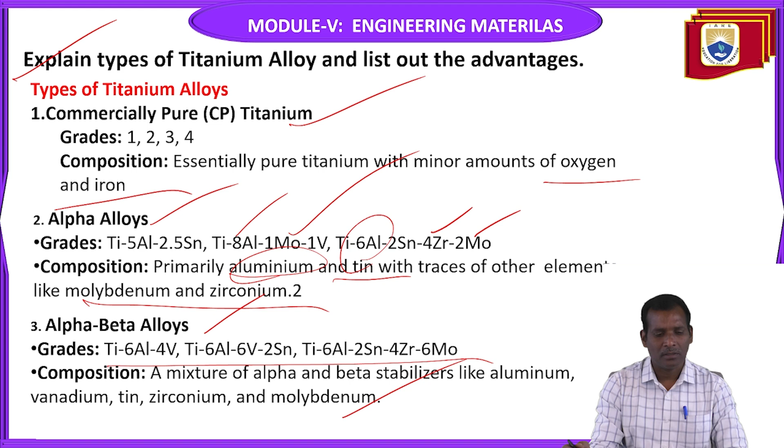Alpha beta alloys: the grades are given like this. The composition is a mixture of alpha and beta stabilizers like aluminum, vanadium, tin, zirconium and molybdenum. So the categories are commercially pure titanium, alpha alloys, alpha beta alloys, and then beta alloys. For beta alloys the grades are given, with titanium, vanadium, iron and aluminum added, and higher amounts of beta stabilizers like vanadium and chromium, along with molybdenum and zirconium.

The advantages of titanium alloys are: one is high strength to weight ratio. Titanium alloys have excellent strength while being significantly lighter than steel. Another property is corrosion resistance: high resistance to corrosion in various environments, including seawater and acidic conditions. Wherever these materials are exposed to a seawater environment or acidic conditions, they have the resistance to withstand these environmental conditions.

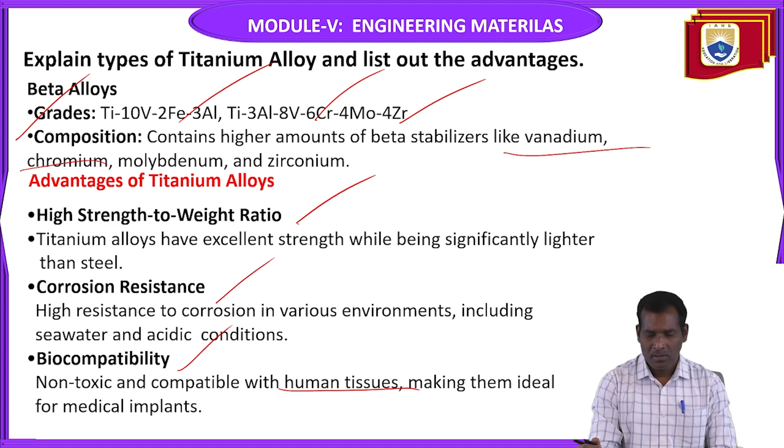High melting point: capable of withstanding high temperatures, making them suitable for aerospace applications. They are widely used in aerospace due to this high melting point property. Another important thing is fatigue resistance: superior fatigue strength compared to other metals, which is crucial for components subjected to cyclic loading.

When a component is subjected to cyclic loading, that means repeated loads, the component will fail after a certain number of cycles. This is known as the fatigue phenomenon, which is very important for mechanical components. That's why in mechanical engineering the fatigue testing machine is used to find the fatigue strength before selecting the material and before manufacturing the product. Titanium alloys have this resistance compared to other materials.

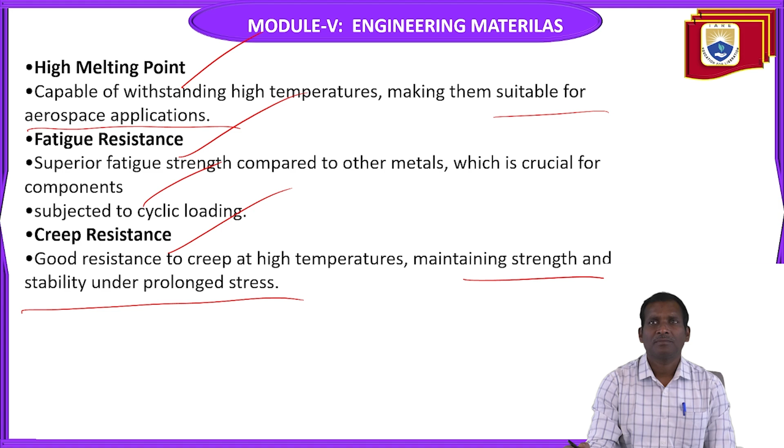So what are the applications of titanium alloys? The titanium alloys applications are: one is aerospace, aircraft frames, jet engines, space exploration vehicles due to their high strength and low weight, and in the medical field, implants, prosthetics, surgical instruments because of their biocompatibility and non-toxic nature.

And marine: submarine components, ship parts and offshore structures for their excellent corrosion resistance in seawater. And chemical processing: equipment exposed to harsh chemicals such as heat exchangers and reactor vessels. And in the automotive field, high performance automotive parts like exhaust systems and engine components.

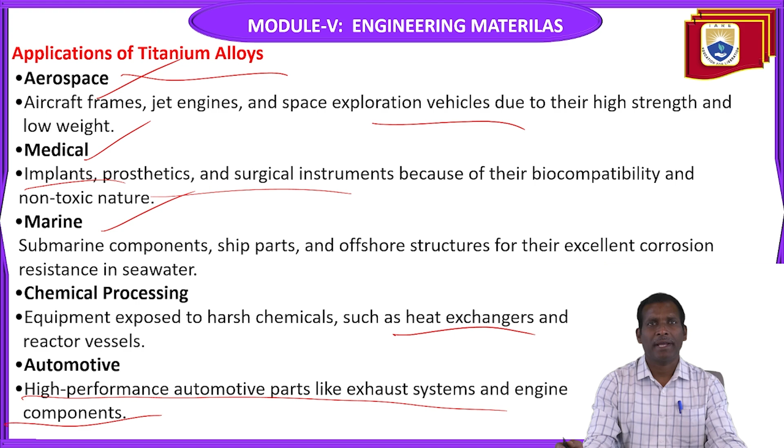So these are the main applications of titanium alloys in various sectors like aerospace, medical, marine, chemical processing units and automotive structures. So in case of aerospace applications, the aircraft components are made with these titanium alloys, mainly engine parts, airframes and landing gears.

In aerospace applications, engine parts and landing gear are very important. Due to their high strength to weight ratio, corrosion resistance and ability to withstand high temperature, titanium alloy materials are used to manufacture these two components. For spacecraft, their lightweight and strong properties make them ideal for spacecraft structures and components.

Next one is the medical applications. One is implants and prosthetics. Titanium alloys are biocompatible, meaning they are not harmful or toxic to living tissues, making them ideal for surgical implants like hip and knee replacements, dental implants, and prosthetic devices. So that's why these titanium alloys are used in dental implants and medical implants like

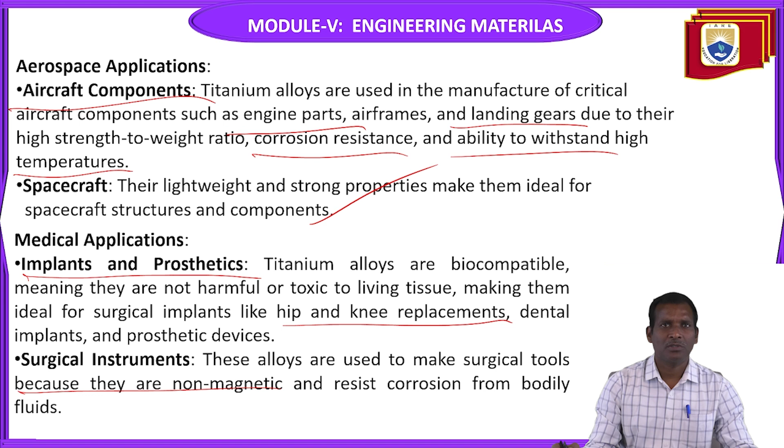In the case of industrial applications, chemical processing equipment: due to their excellent corrosion resistance, titanium alloys are used in chemical processing plants for tanks, heat exchangers and piping systems. Whereas in power generation sectors, they are used in components of power plants, including nuclear power plants, due to their ability to withstand high temperatures and corrosion.

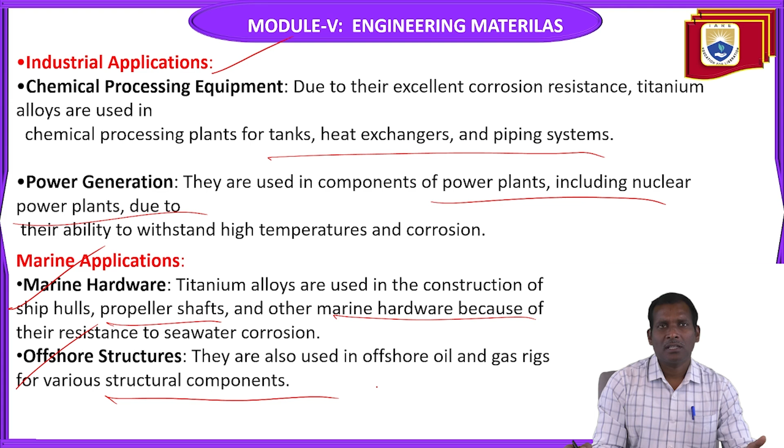In the case of marine applications, marine hardware and offshore structures. Titanium alloys are used in the construction of ship hulls, propeller shafts, and other marine hardware because of their resistance to seawater corrosion. They are also used in offshore oil and gas rigs for various structural components. So these are the marine applications.

In case of automotive applications, titanium alloys are used in the manufacture of high performance automotive parts such as engine valves, connecting rods, and exhaust systems due to their strength, lightweight nature, and resistance to high temperatures.

Sports equipment: golf clubs and bicycles. The lightweight and strong properties of titanium alloys make them ideal for high performance sports equipment, including golf clubs, bicycle frames, and tennis rackets. So these sports equipment are made with titanium alloys due to the lightweight property and strength, and it gives long life.

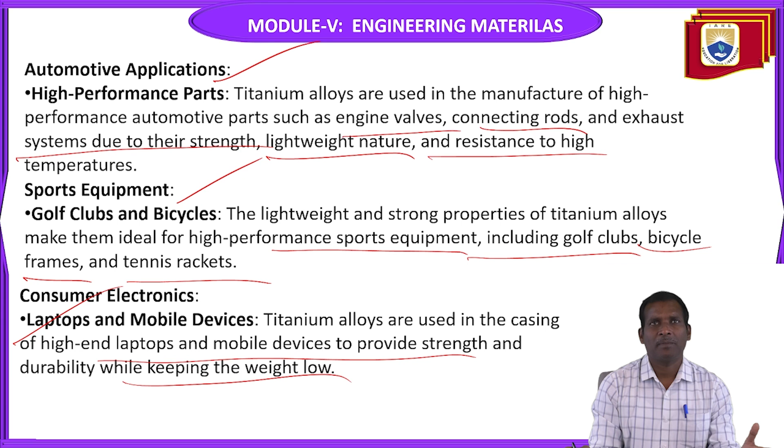It means high performance. Consumer electronics: titanium alloys are used in the casing of high-end laptops and mobile devices to provide strength and durability while keeping the weight low. So due to these properties, they are used in consumer electronics goods, sports equipment and wherever high performance parts are required in automotive applications.

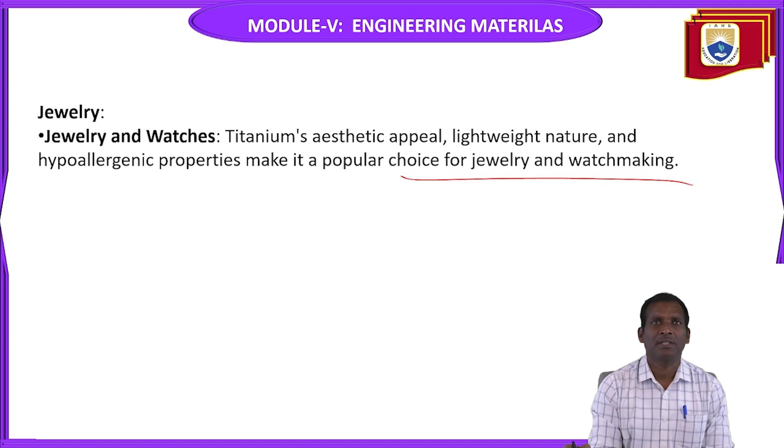Next, jewelry and watches. Titanium's aesthetic appeal, lightweight nature, and hypoallergenic properties make it a popular choice for jewelry and watchmaking. So due to the good appearance of this material, they are widely used in jewelry making and watch making units.

So, what is the difference between alpha and beta alloys? Titanium alloys are classified into different types, and alpha and beta is one classification. The composition varies. Alpha alloys typically contain alloying elements like aluminum and oxygen, which stabilize the alpha phase. These alloys may also include small amounts of beta stabilizers like vanadium or molybdenum, but not enough to form significant amounts of beta phase.

The microstructure is predominantly alpha phase, that is hexagonal close packed crystal structure. Next one is stability. The alpha phase is stable at room temperature and up to relatively high temperatures. The properties: strength is generally lower than beta alloys, but can be improved with alloying and heat treatment. Ductility: higher ductility and toughness compared to beta alloys.

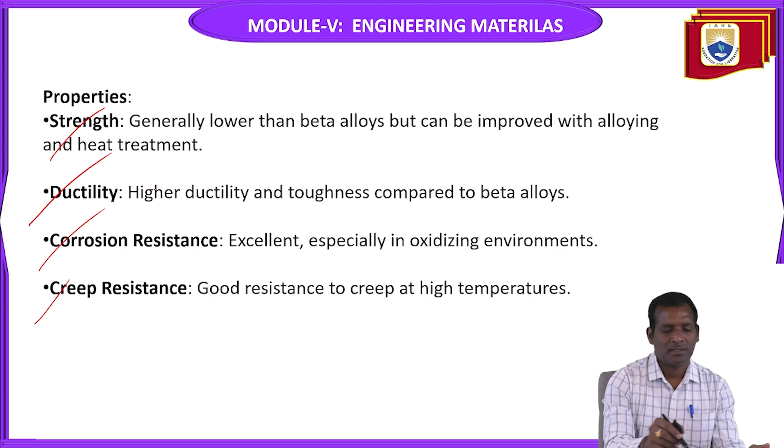And also corrosion resistance: alpha alloys have excellent corrosion resistance, especially in oxidizing environments. Similarly, creep resistance: good resistance to creep at high temperatures. So, what are the applications? High temperature applications: due to good creep resistance, they are used in applications like jet engine components.

Similarly, aerospace and marine: used in airframes, landing gear, and marine applications where corrosion resistance is critical.

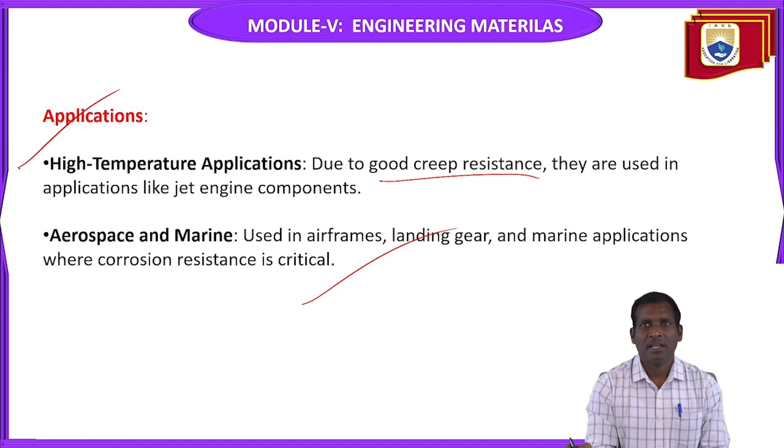Whereas in beta alloys, the composition is rich in elements like vanadium, molybdenum, niobium and chromium, which stabilize the beta phase. The microstructure is predominantly beta phase, body centered cubic crystal system, BCC. Whereas alpha has a hexagonal close packed crystal structure, HCP.

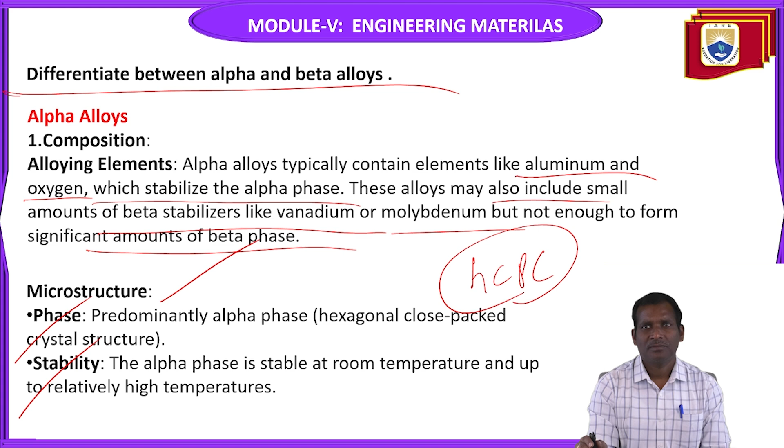This is the crystal structure. Whereas in this case, beta has a body centered cubic crystal structure. Stability: the beta phase is stable at high temperatures but can transform to alpha or alpha-beta phases at lower temperatures.

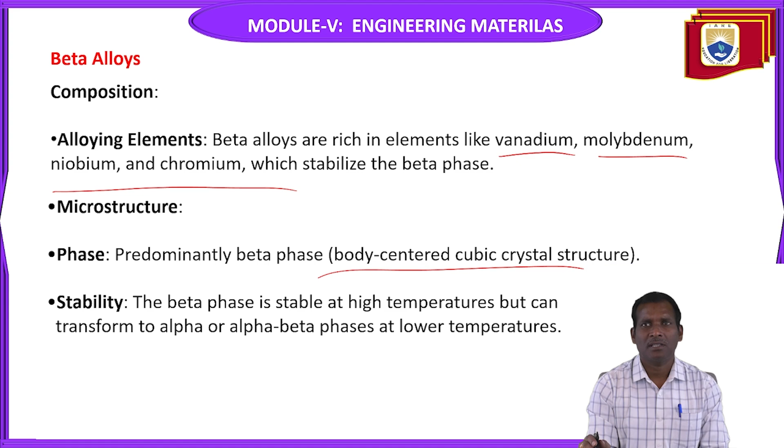Next, properties. Strength: the beta alloy has high strength compared to alpha and alpha-beta alloys, especially after heat treatment. Next, ductility: lower ductility and toughness compared to alpha alloys. Corrosion resistance is good, but generally not as high as alpha alloys.

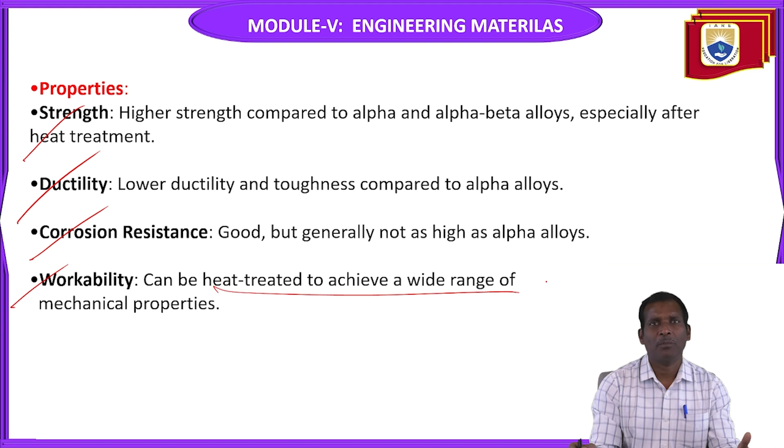Workability: it can be heat treated to achieve a wide range of mechanical properties. The applications are high strength applications, used where a high strength to weight ratio is essential, such as in aerospace fasteners and landing gear. So wherever a high strength to weight ratio is required, these materials are used.

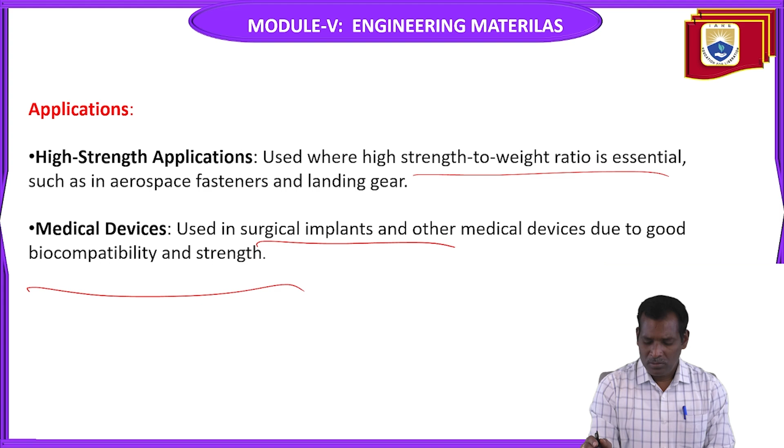Next, medical devices. Used in surgical implants and other medical devices due to good biocompatibility and strength. We have already studied the biocompatibility and strength properties in previous materials. Due to these two properties, it gives strength and durability, and also compatibility with the human body. So these are the main applications of beta alloys.

Explain various properties of ceramics. Mechanical properties: hardness, brittleness, and strength. Hardness: ceramics are generally very hard materials, which makes them resistant to wear and abrasion. So these materials are used in cutting tools and wear resistant coatings.

Similarly, brittleness. Ceramics tend to be brittle. It means they can fracture or shatter under stress without significant plastic deformation, without giving any indication like in the ductility property; the failure will occur. So this limits their use in applications where impact resistance is required.

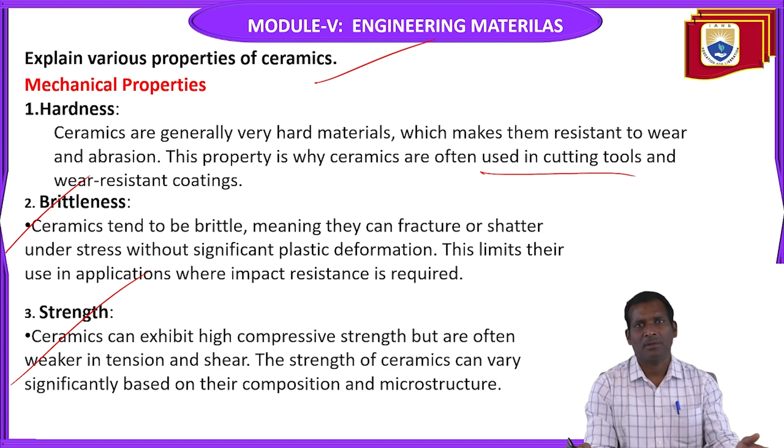Next, strength. Ceramics can exhibit high compressive strength, but are often weaker in tension and shear. The strength of ceramics can vary significantly based on their composition and microstructure. Next, elasticity. Ceramics typically have a high modulus of elasticity, meaning they are very stiff and do not deform easily under load. Similarly, thermal properties: high melting point, thermal insulation, and thermal expansion.

These materials have high melting points, so they are suitable for high temperature applications like furnace linings and other thermal barriers. Thermal insulation: many ceramics are excellent thermal insulators due to their low conductivity, making them ideal for heat shields and insulators. Thermal expansion: these materials have a low coefficient of thermal expansion, so they do not expand or contract significantly with temperature changes.

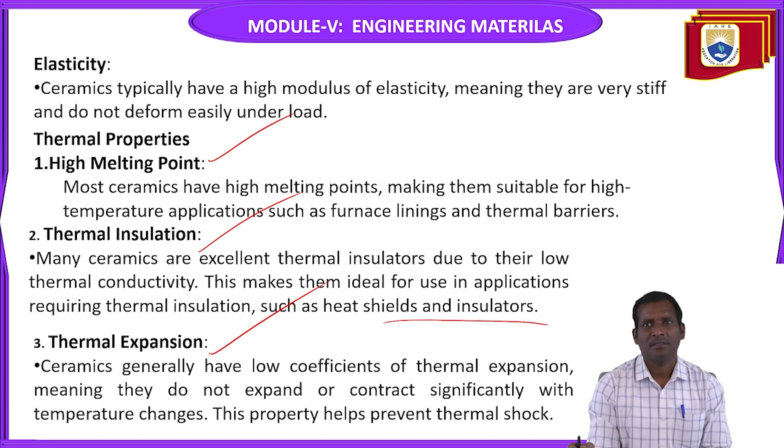Electrical properties: electrical insulation, piezoelectricity, and semiconducting properties. Many ceramics are good electrical insulators, making them useful as insulators in electronic and electrical devices. Piezoelectricity generates electrical charge in response to mechanical stress, used in sensors, actuators, and transducers. Some ceramics like silicon carbide and certain metal oxides exhibit semiconducting properties and are used in electronic components.

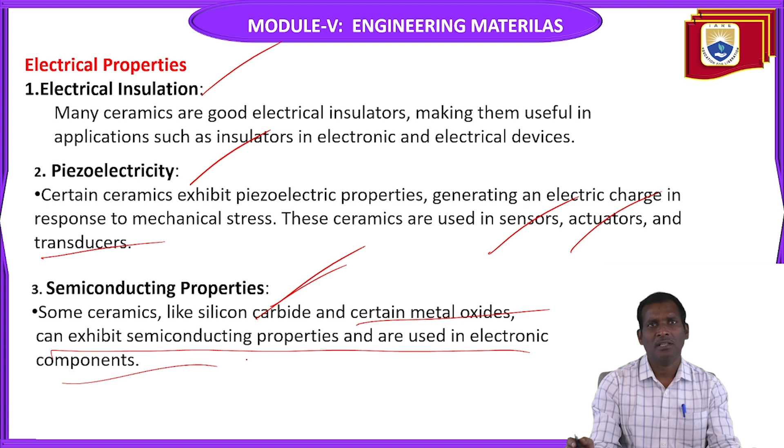Chemical properties: corrosion resistance and inertness. Ceramics are generally highly resistant to corrosion and chemical attack, even at high temperatures. This makes them ideal for chemically harsh environments, such as chemical processing equipment and medical implants. Similarly, inertness: they do not react easily with other materials.

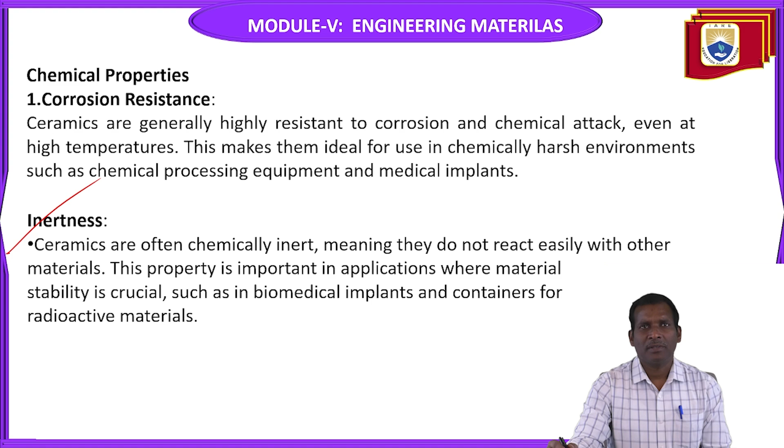Physical properties: density and porosity. The density of ceramics can vary widely. Some ceramics are very dense and heavy, while others, like foamed ceramics, are lightweight. Porosity: ceramics can be engineered to have varying degrees of porosity, from fully dense to highly porous. Porous ceramics are used in applications such as filters and catalyst supports.

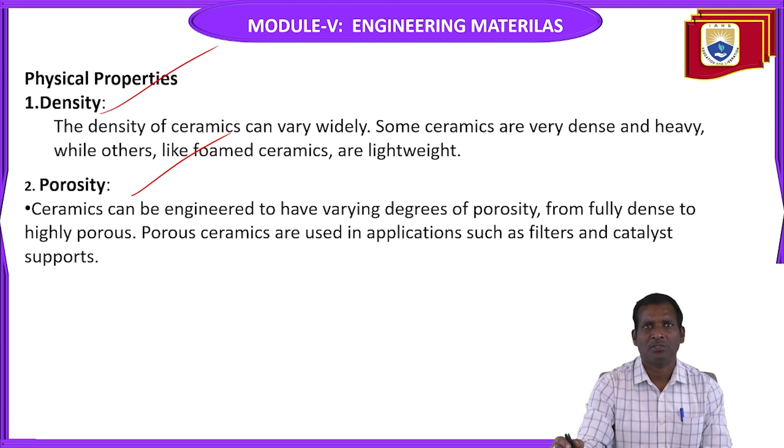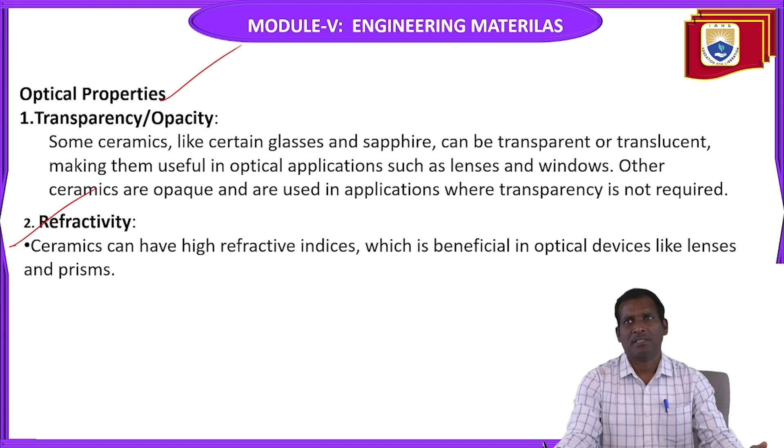Next, optical properties: transparency, opacity, and refractivity. Some ceramics like certain glasses and sapphire can be transparent or translucent, making them useful in optical applications such as lenses and windows. Other ceramic materials are used where transparency is not required. Refractivity: ceramics can have high refractive indices, which is beneficial in optical devices like lenses and prisms.